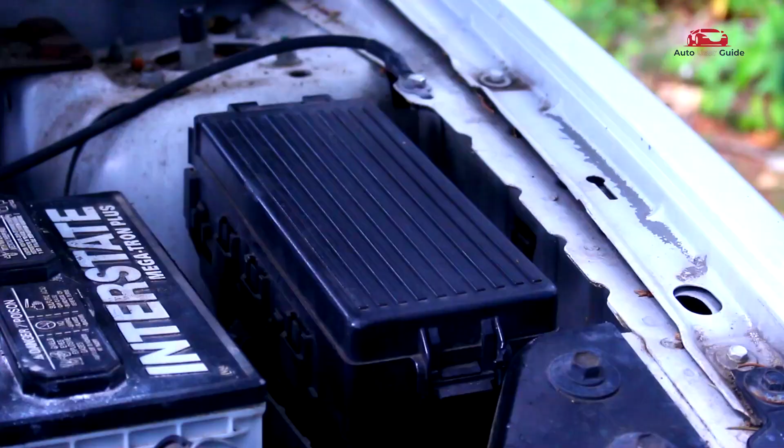Curious about the fuse box location and diagram for the 2023 Lexus IS 350? Wondering where each fuse panel is and what its functions are? This guide answers all your questions, helping you locate and understand every fuse easily.

Engine compartment fuse box.

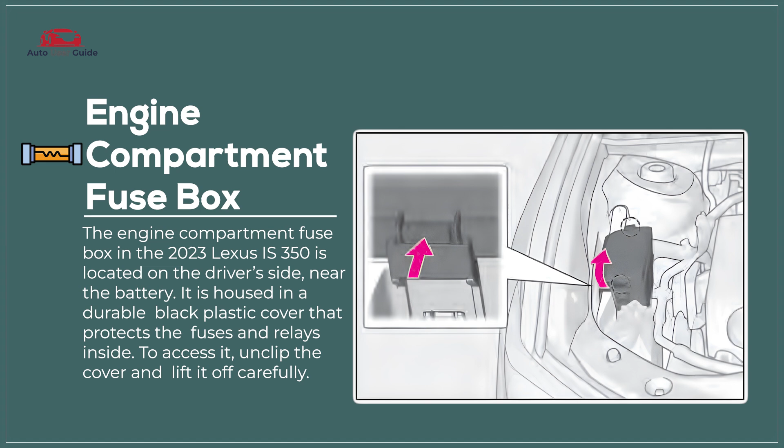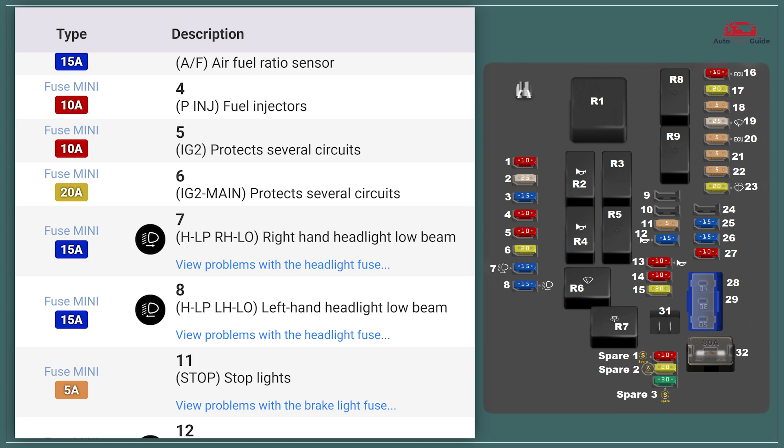The engine compartment fuse box protects essential systems like the engine, cooling, lighting, and safety features. It is housed in a durable plastic enclosure with a labeled cover for easy identification of fuses and relays. The box contains high amperage fuses for major components and standard blade fuses for smaller circuits. It helps prevent electrical failures by cutting power in case of overloads or short circuits. Designed for durability, it offers protection against heat, moisture, and debris.

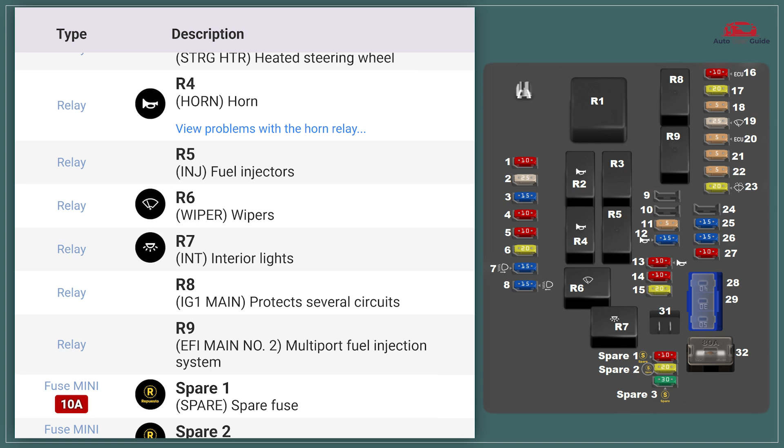Interior fuse panel.

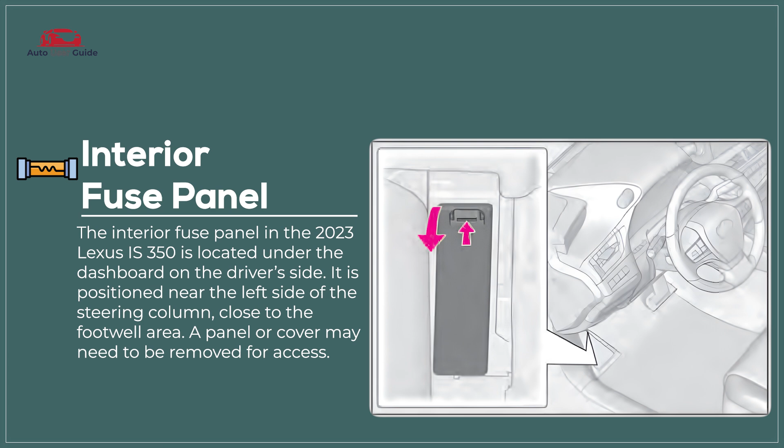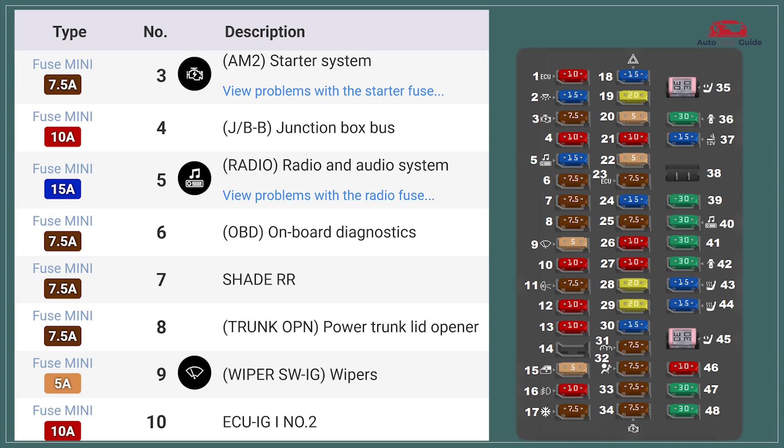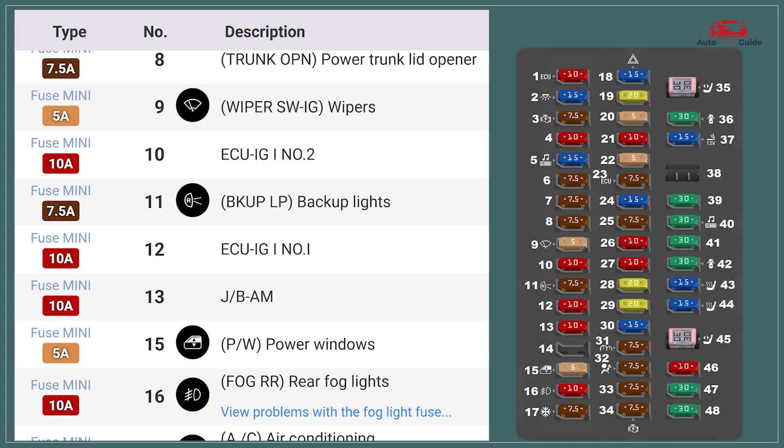The interior fuse panel protects various cabin electrical components, such as the infotainment system, climate control, and power accessories. It is housed under the dashboard with a labeled cover for easy fuse identification. The panel contains low amperage blade fuses designed to safeguard interior electrical circuits. It helps prevent system failures by cutting power in case of overloads or short circuits. Designed for reliability, it ensures smooth operation of the vehicle's interior electronic features.

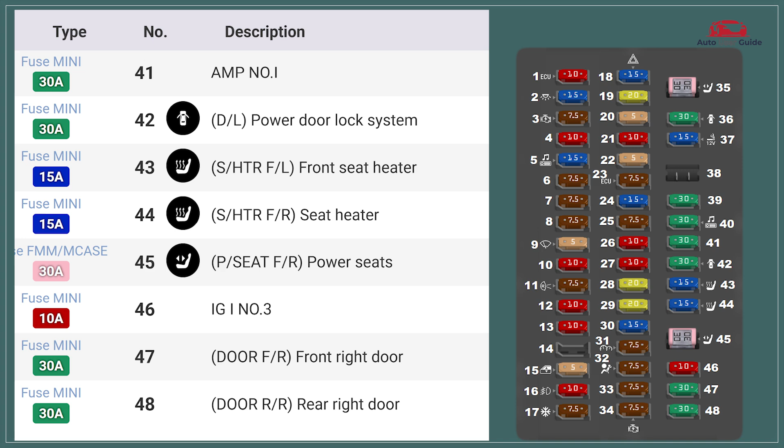Types of fuses: blade fuse, standard blade fuse, mini blade fuse, maxi blade fuse, micro 2 fuse, micro 3 fuse, J-case fuse.

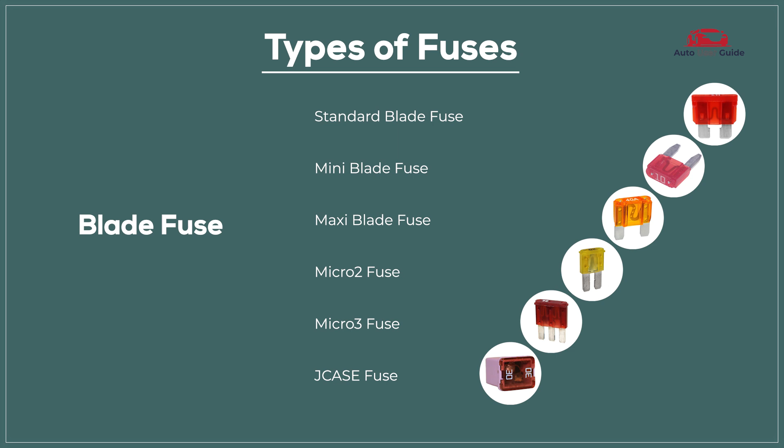Glass tube fuse, AGC fuse, SFE fuse.

Ceramic fuse, Bosch fuse, DIN fuse.

PAL fuse, low profile fuse, standard PAL fuse.

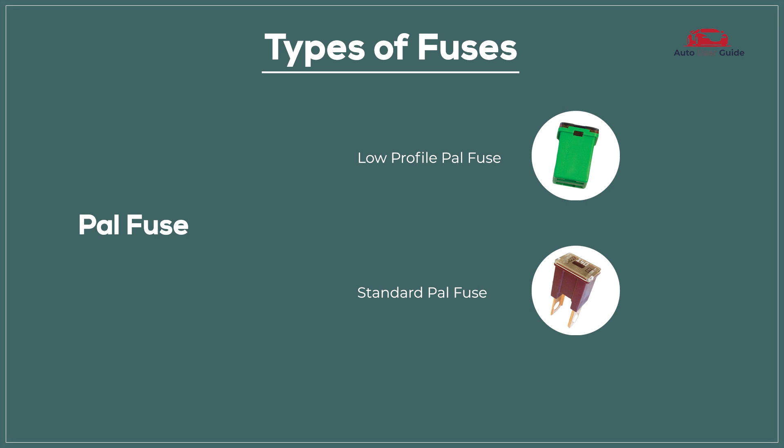Link fuse, mega fuse, high amperage link fuse.

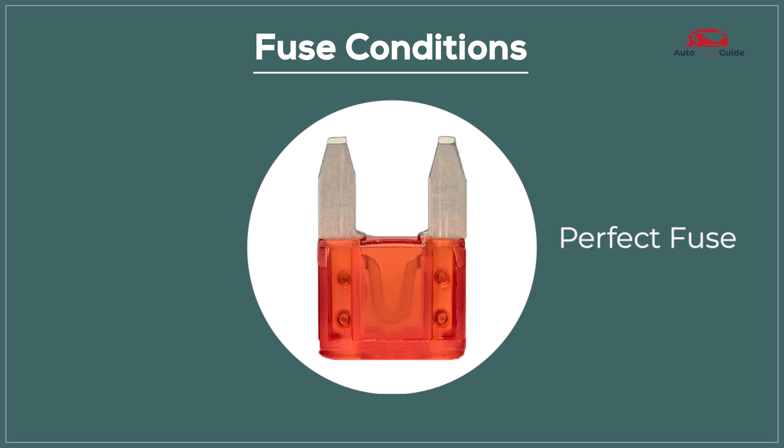Fuse conditions. Blown fuse: a blown fuse means it's no longer functioning and needs replacement, while a perfect fuse is in good working condition and performing as expected.

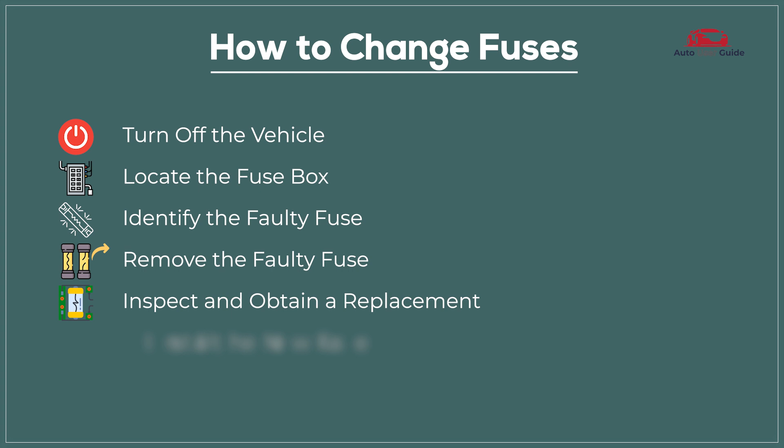How to change fuses: Turn off the vehicle. Locate the fuse box. Identify the faulty fuse. Remove the faulty fuse. Inspect and obtain a replacement. Install the new fuse. Test the replacement.

Safety precautions: Disconnect the battery. Wear protective gear. Use proper tools. Check for the correct amperage. Avoid water exposure.